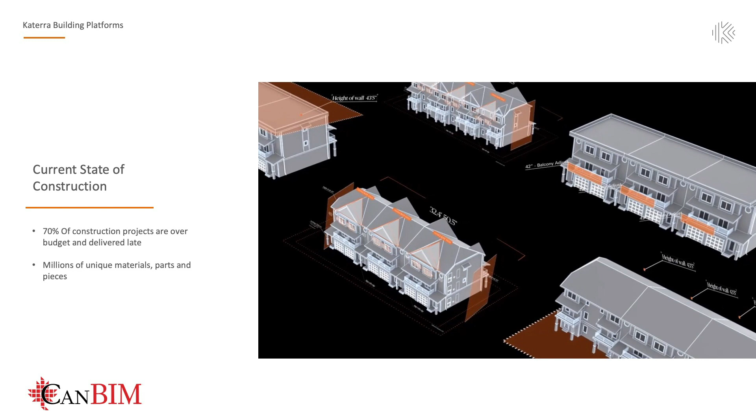So what you see here on this slide is that we all know that right now, every project, pretty much almost every project, is custom. This is how our industry always was, and this is to a very large extent how our industry is right now. So with Katerra, we try to build these platforms.

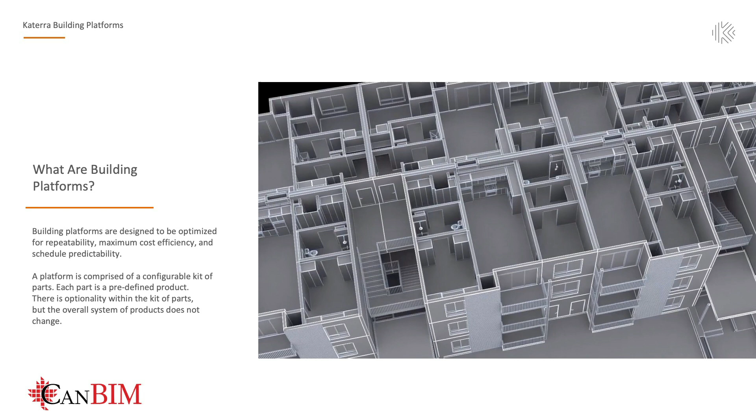The first platforms that Katerra developed were based not on mass timber, but on steel studs and wood studs, and it was residential. We call it K3. It's residential buildings with very aggressive goals towards the budgets, and very high levels of prefabrication - walls with mechanical, with electrical, and with everything else.

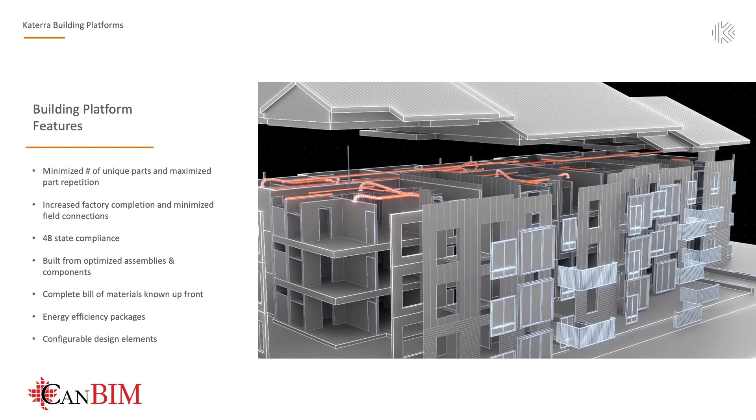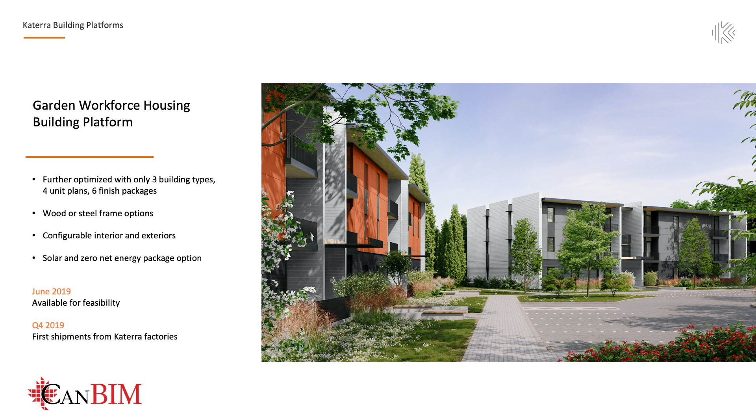Another one is the garden market, which is similar in my mind - development of buildings that are also residential. So the start was with residential. And this is kind of what I'm doing - I'm now developing a platform for office buildings.

So it's a 6-story office building, and it's really funny - I just talked to Lucas, and we actually have exactly the same grid: 20 feet spanning double CLTs, and then 25 feet spanning the glulam beams. And nobody looked at each other's drawings.

We just ended up with this because in timber engineering, once you do enough simulations regarding lowering the cost - just to give you an example, if the columns are too close to each other, obviously the cost is high. And then you go down with the cost somewhere around 20 by 25 feet, the cost hits the bottom. And then when you go towards 30 feet by 30 feet - and we all know the concrete industry, this is kind of a standard for office buildings, 30 by 30 with maybe flat concrete slabs - this is where our price will already be higher.

So in wood, this is how we based our CLT office platform. We stopped at 6 stories. Why? Because in the United States, you can fully expose CLT beams and columns up to 6 stories.

If you go 7, 8, 9, and maybe 7, 8, you can negotiate a little bit if your building official or building authority is willing to negotiate. But the code actually changes abruptly and says that only 20% of the CLT can be exposed. So why would a private developer pay for CLT if only 20% is exposed? So we just stuck with 6 stories. And this is what we're doing.

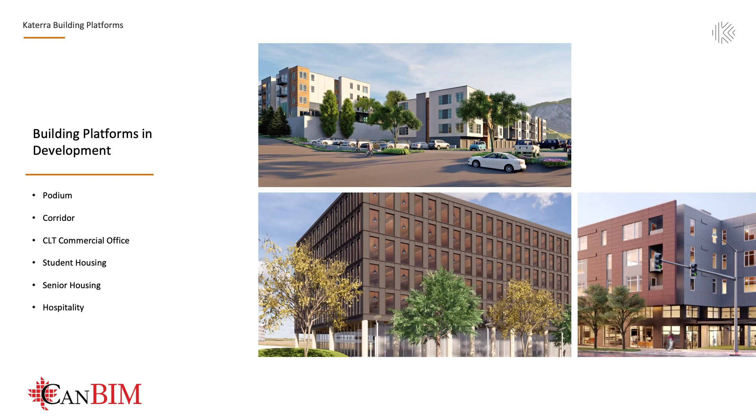Now there are issues with all these softwares. CATIA seems to be a wonderful software, and Santiago will go into details why it's easier to model everything in CATIA, but it's hard to find trained people in CATIA. It's expensive to train people in CATIA, and it's expensive to pay for a business license for a single computer in CATIA 3D Experience. So it is limiting the growth of software like this from a pure business sense.

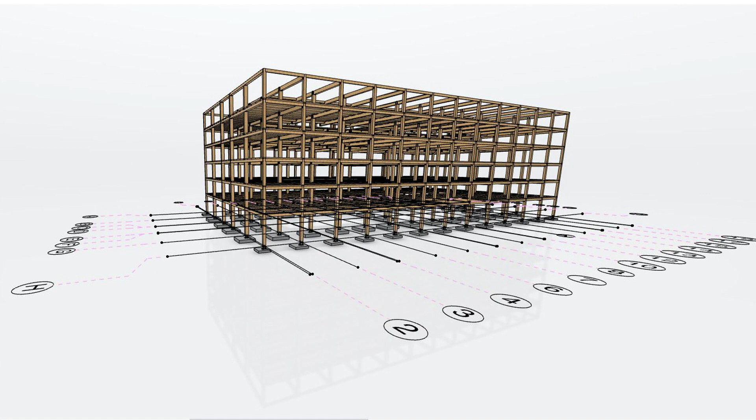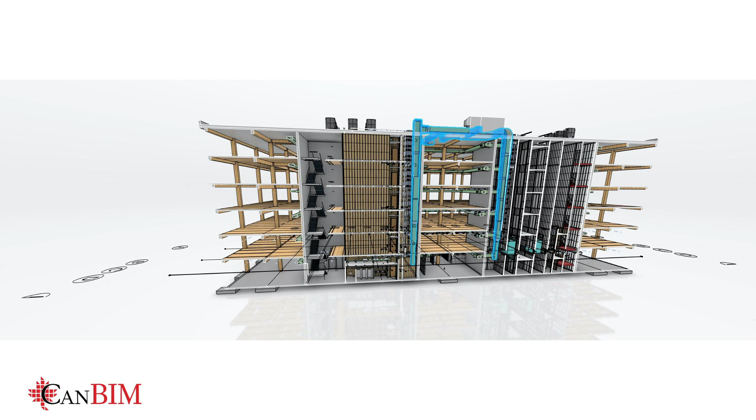But if you actually put everything in CATIA, like we did for this building, we started with structure—beams, columns, CLT slabs—and then every single screw, every single notch, and everything else. Nothing new, all of this can be done in CADWork. But then in CADWork we couldn't put all the mechanical and electrical and architectural. In CATIA, we're able to put all of this at the same time. I know there are a few firms in the world, architectural firms, using CATIA, but in our part of the world it's by all means not popular. This is not a standard way how we're doing buildings.

So why are we using CATIA 3D Experience for this? It's easier to generate the bill of materials, which is huge when you do products. We generate what we call KPNs—numbers for each item in the building. In these garden buildings, they just finished generating these numbers—over 1,500 different pieces. Every piece has a number, every piece has a price, every piece has a negotiated agreement with the supplier if it's an outside supplier, or an internal price. It's a lot of work, and you need a lot of help from software to do it like this. So this is one reason why we're using CATIA.

And the second reason is that we realize that in many cases, people will not want a building which is 120 feet by 240 feet. They will want something a little shorter because the site is shorter, or maybe we have to go with a cross shape. Because it is all parametric design, it will be relatively easy—that's what our people from CATIA are telling us—to get the shop drawings, to get all the geometry already transferred into something very similar.

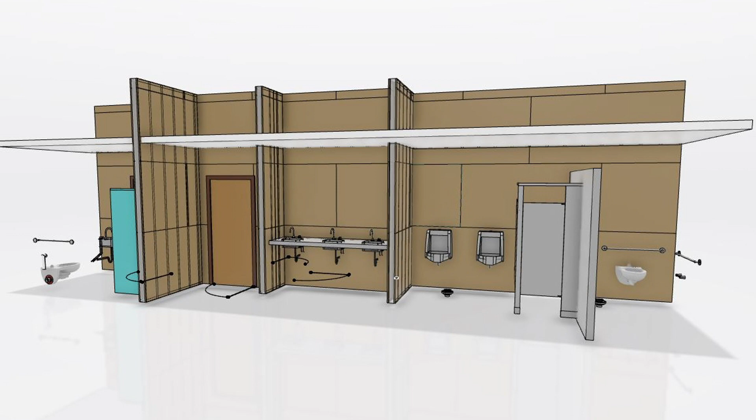This is the hope that we have, and this is why we're changing our thinking into designing buildings as products. As the last slide I will talk, and Santiago will continue, is that we're going further than that. We're developing 3D units, kitchen units and bathroom units that we're already doing for these framing buildings, where we're just dropping it, and we're very proud that it's now taking 4 hours to unpack all of this and install a bathroom in a residential building.

We're now developing the same thing for mass timber. We're just starting, but that's the plan how to do it. So our goal is to ultimately change the mass timber office buildings from the projects, through the platforms, through the products. Santiago is fully trained in software, and he will go deeper in how we're doing that. Go ahead, Santiago.

We've heard the expression before that when we use BIM or when we use Revit, one of its key advantages is that we model or represent the building the way we're going to build it. But anyone who has used Revit for a meaningful amount of time understands that's not entirely true, because of time constraints and perhaps technological constraints. You're not able, as a practitioner, to represent the building in true fidelity exactly how it's going to be built. And hence the reason for which there's commonly a BIM model by the designers, but then separately the contractor has to make their own model, because there's an intellectual divide, a contractual divide, an economical divide, a risk mitigation divide, a divide of every sort between the design work and the execution of the construction.

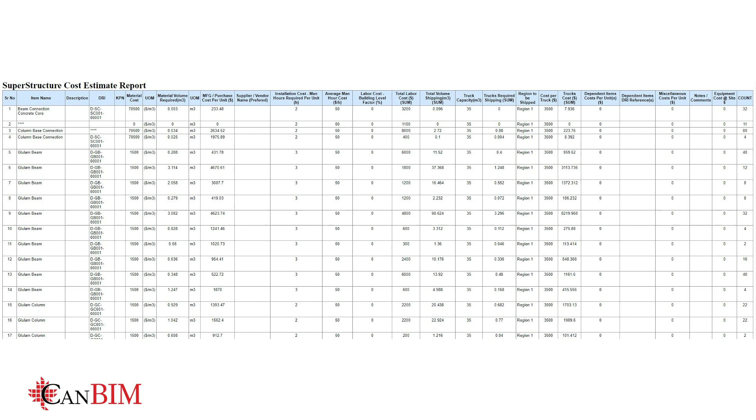With an intelligent model like CATIA, we're able to generate printed materials like exploded views or shop drawings that would enable us to problem solve and present information in a way that some folks are still used to.

Frank mentioned in the previous presentation that you're never too large for it to disrupt, and he also said digital transformation begs the question, what are we transforming into? With a company like Katerra, you would assume that because it's a startup and fairly new, there is no transformation because the premise is already that we're doing things differently. But that is not entirely true.

Many of the people who work in Katerra come from industry. They come from architectural firms. They come from structural firms. And the way they think has an inheritance of how they would practice design in an architectural or structural firm. And so there is a transformation that has to happen at the individual level.

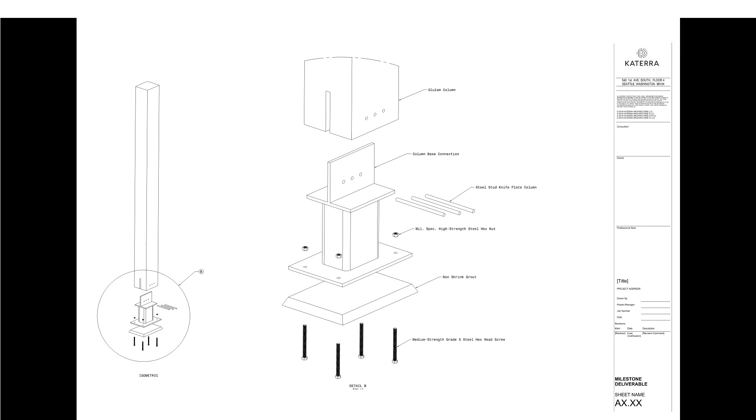Each practitioner needs to transition from working with 2D drawings like this and eventually get used to working with a 3D model where you would no longer need a drawing to get answers to your questions. Maybe I should stop here because I have a tendency to ramble, and take some questions.

Hi, Santi. Hi, Puyan.

In the process of making the decision to go with CATIA, that's completely changing the platform.

That's a good question. I can't speak for all the voices involved with moving forward with CATIA, but from perspectives I can relate to, there are a few key indicators. One is the readiness of the technology. CATIA, or the 3D Experience platform, is ready to use. You don't need to rewire it. It has maturity proven through the aerospace and automotive industries. Perhaps we need to learn how to leverage it rather than modify its core capabilities.

Whereas if we're using a suite of products like Autodesk, they are not ready for use in the way the 3D Experience platform is ready to deploy in an organization. Another point is the 3D Experience is ready in the sense that there's no need to interchange files, because it comprises a suite of many different applications that natively interact with the same model. That resolves a series of technical complications, and you can focus on simply working on the same model without translation between departments or disciplines.